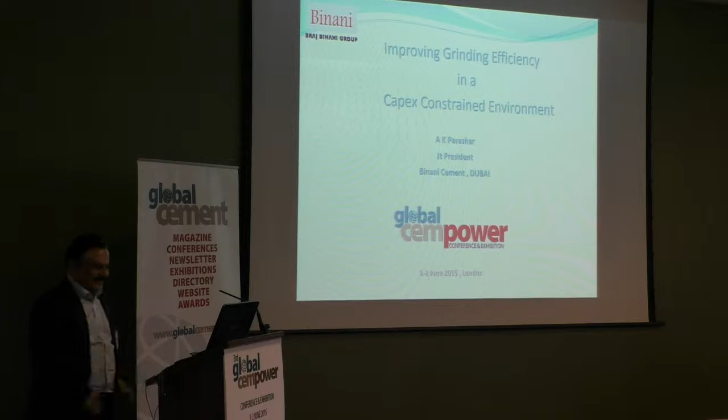Well, we really need a power pack presentation after this lunch.

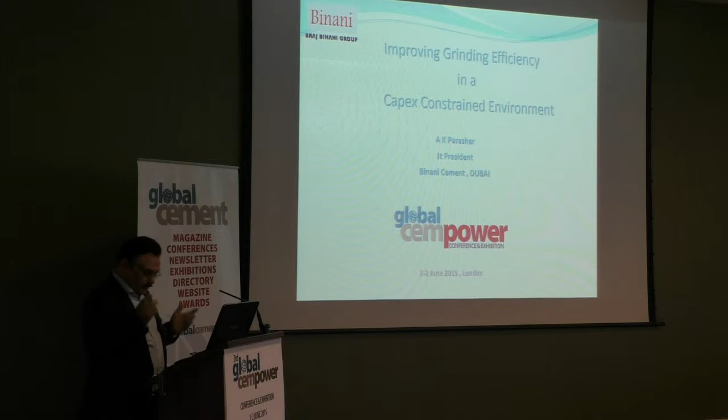Just to give you a very brief introduction of what we are and what we would like to become in a few years' time. This is basically the overview of our cement operations. In terms of cement, we are present in India with 6.5 million ton capacity, making various products. We are present in UAE, and we want to extend our footprints in Africa.

And very soon, what you see in green, we are most likely going to put up a greenfield project in the UAE region. Well, ambitions are quite big. In fact, we want to take the total capacity to almost 24 million ton in the next 5 years. Apart from cement, Binani is fifth largest in terms of glass fiber production. We are also into zinc, composites, and infra projects. So that's a brief introduction of Binani operations.

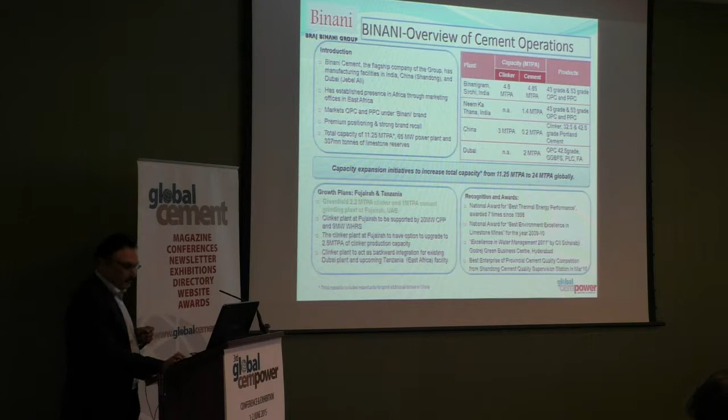Okay, let's come back to the main subject. So this is totally different from what you have heard in the last 1.5 days. We are talking of something which is time tested, but more traditional in nature. Personally, I have almost completed 10 years with standalone grinding units. See, it's always very nice to convey to someone that I operate the largest grinding unit. But when you say largest, you also bring bigger problems with you.

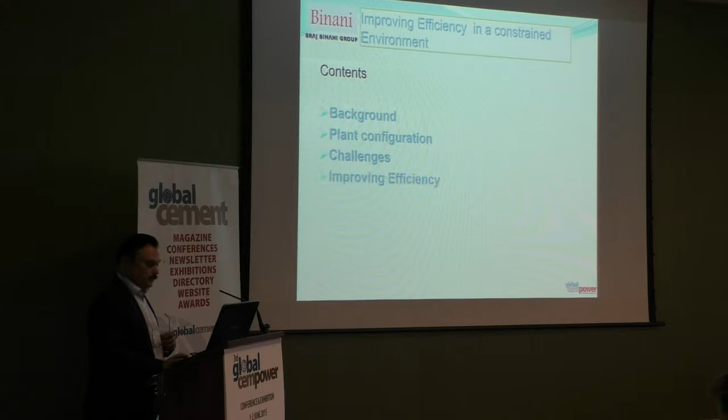You have more variables. You are dependent on material which is 100% coming from outside, because you are not producing anything. So this is my second standalone grinding unit. The first one was sold twice. I did nothing. And this one I have now been operating for the last 2.5 years. Coming to contents, we have the background, plant configuration, what are the challenges we are facing, improving efficiency, future plans.

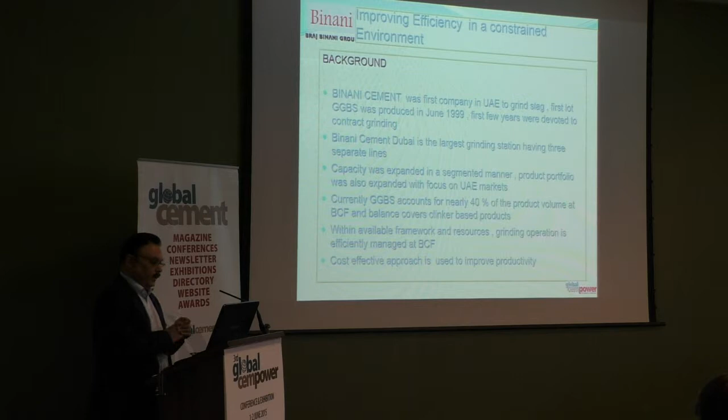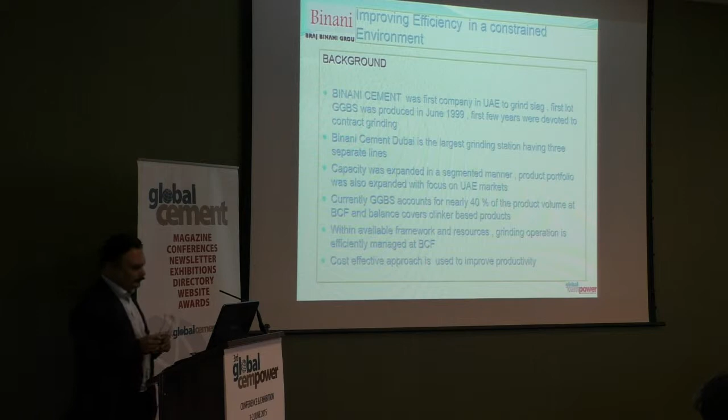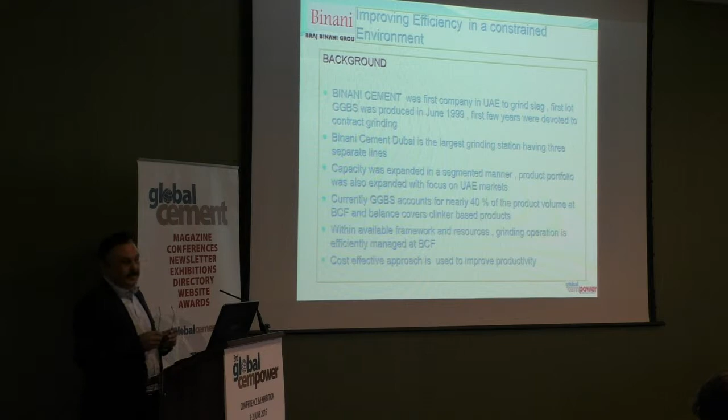Coming back to Binani Cement, in fact, you will find a lot of flavor in terms of slag. And the reason is, Binani was first to introduce slag in this region, and we started with not clinker grinding but slag grinding, way back in 1999. Capacity was expanded in a segmented manner. We started in 1999, then added in 2006, and then a further addition in 2011. Currently, slag is not even 40%, it is touching 50% of our total production.

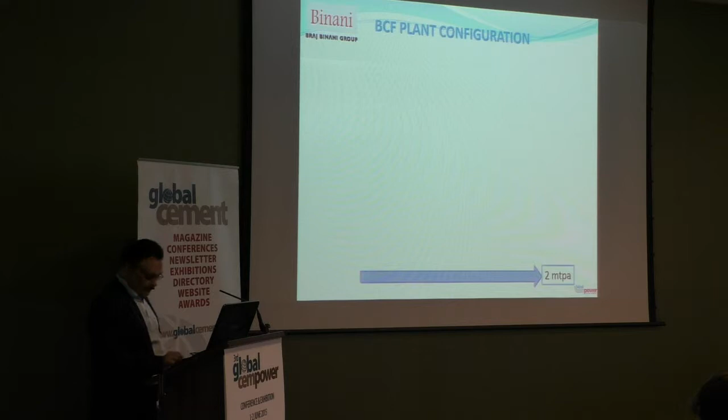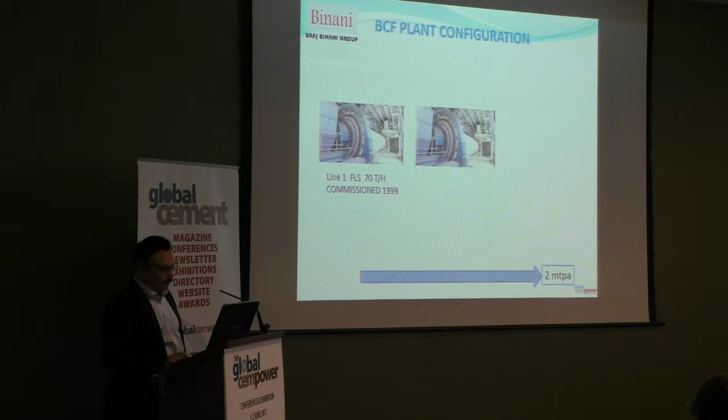Within the available framework and resources, we are trying to manage our job efficiently and adopt a cost-effective approach to improve both productivity and efficiency. Now let us look at the plant configuration. We have the first mill, which was installed in 1999. It is an FLS mill, rated at 70 tons per hour. The second one, again an FLS mill, absolutely no change in these two mills. This was installed in 2006.

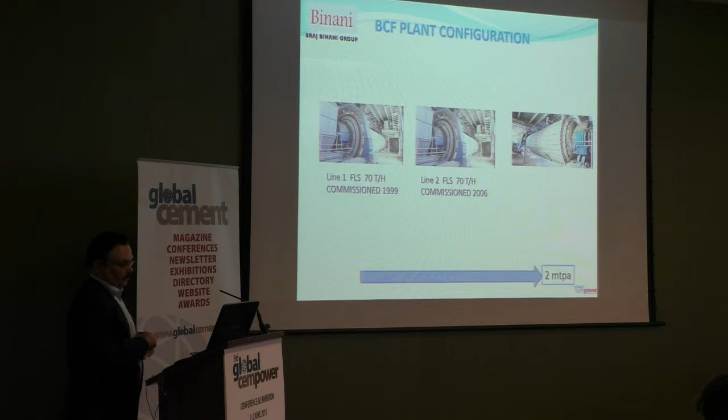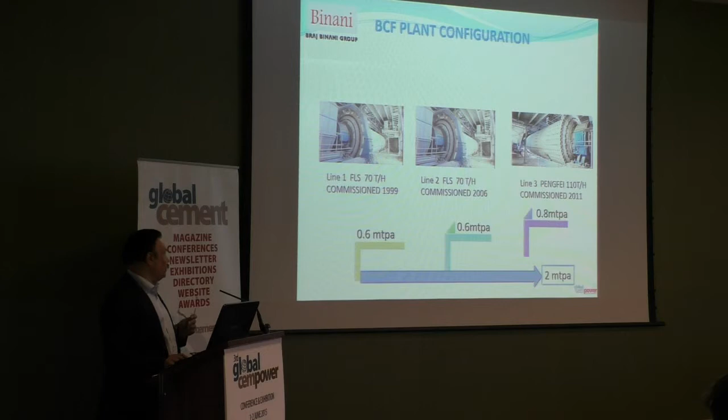And then we have the third mill, which is a Chinese mill. The manufacturer is Pengfei. It's a much larger mill, 110 tons per hour. But all of them are ball mills. We are quite happy with the first two. They have given us great service. The first one has been in operation for more than 15 years, no problem. But with the Chinese mill, we have a number of issues, in terms of the power available, mill internals, and overall performance of the mill. So this is how we have moved step by step. Total installed capacity as of date is 2 million ton.

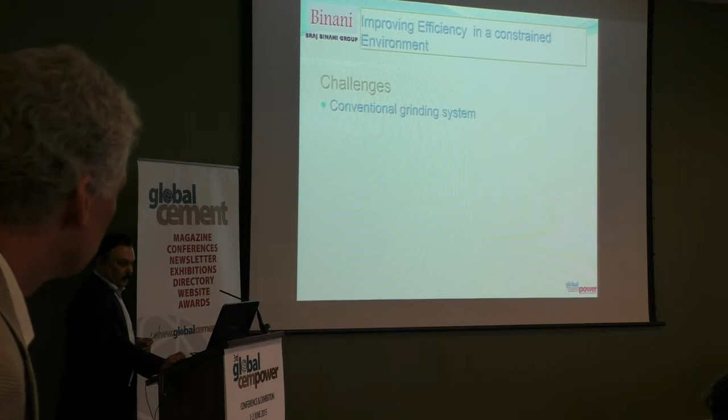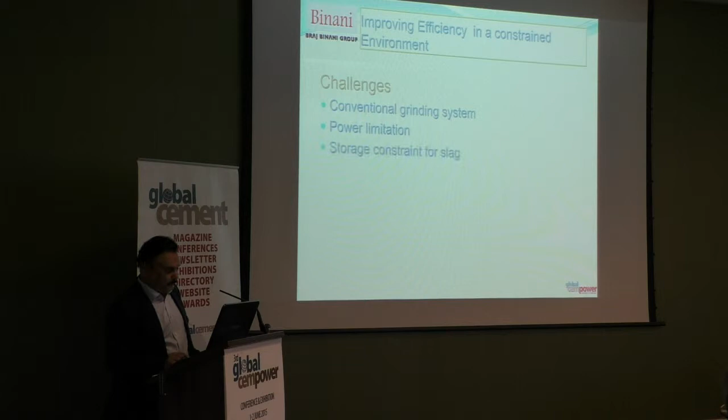What are the challenges? As I said earlier, it's a conventional grinding system, so we don't have the luxury of using a VRM or roller press for grinding. We also have a power limitation, and that's going to be the central theme of this presentation. The storage constraint for slag, which is our main product. Very competitive market. All of them are conventional closed circuit ball mills. You have a limitation. There is no pre-grinder arrangement as of date.

Then, being a standalone grinding unit, clinker grindability will change. The moment you change your source, you will have an impact on clinker grindability. So if you have a mill which is giving 80 tons per hour, change the source, it may come down to 75. So day in and day out, you have to live with these kinds of challenges. Again, if you are grinding slag, it will come to just half. From 80 tons, it may come down to 40 tons per hour. Higher moisture, you have more problems. So these are system design limitations.

Well, you can use HAG to dry slag, because worldwide slag is never available as a sun-dried material. You have moisture which may range from 5% to 10%. You have to use some kind of drying mechanism. In our case, in both the mills, a hot gas generator is installed, but currently we are not in a position to use it because of the cost involved.

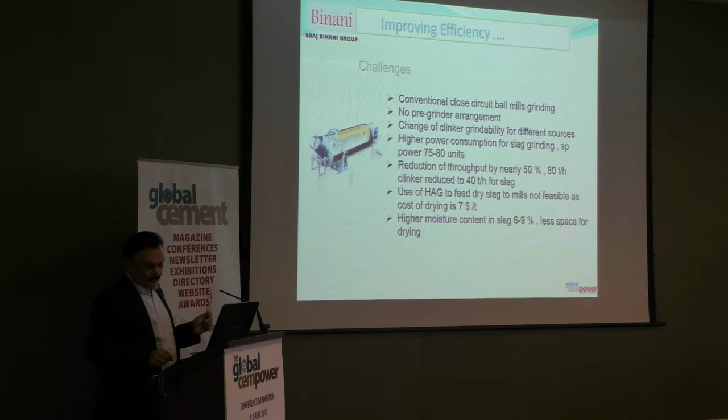Typically what we see is that slag, as received material, may have moisture varying from 6% to 9%. And this is the average figure. So,

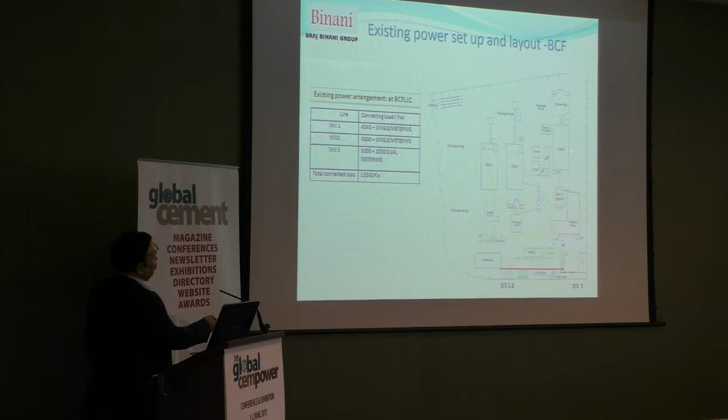So total installed power which was available was 13.5. And this is the layout. The middle one is number 1, number 2 and number 3. Okay.

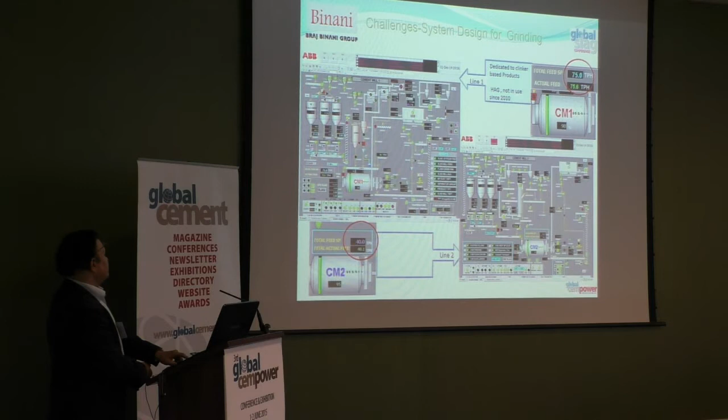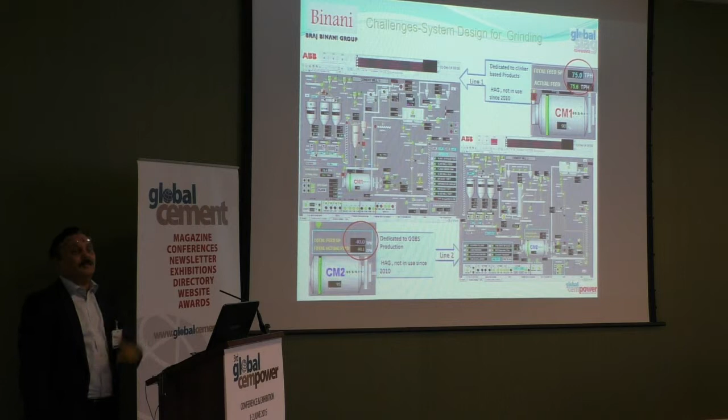Well, coming to system design challenges, as I was trying to explain to you, this is slide number 1. So when we are operating on clinker grinding, normally we get 75 to 80 tons per hour, depending on what clinker we are grinding. We do not use a hot air generator. This is a screen capture of this mill. But when you go to slag grinding, it all changes and it comes to half. So from 75, it has come down to 40 tons per hour. So this is a major impact on your mill capacity and plant availability. You just come to 50%.

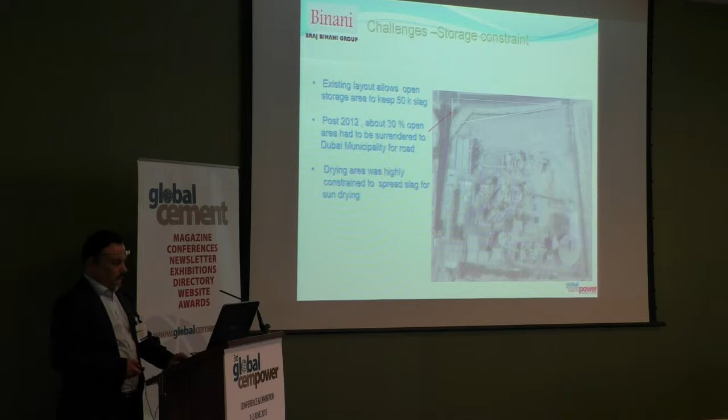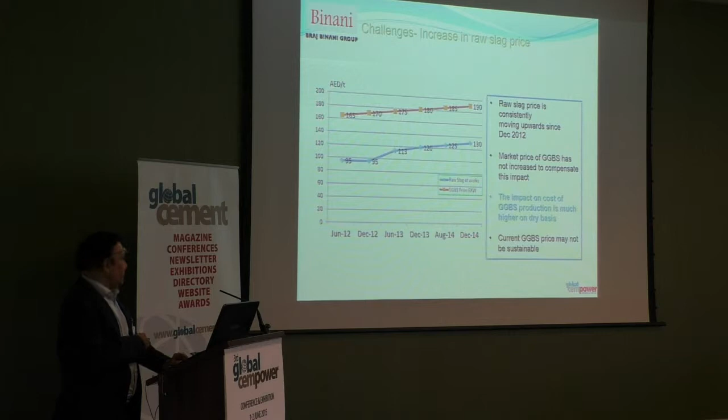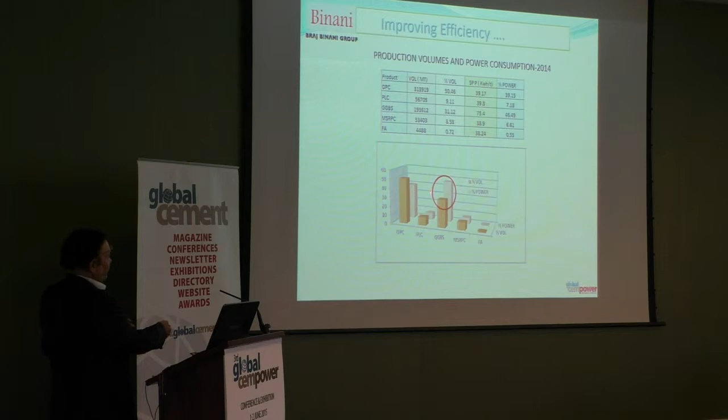But in terms of plant performance, this is what we have done in the last year. Now, what is important here is that this is a normal scenario when we look at clinker-based product. Normally, you consume under 40 units. This is okay. But the real problem is slag. So we consume 75.4 units. What is interesting is that in terms of contribution towards total power, this is totally reversed. So slag with a lesser volume is contributing more towards total power.

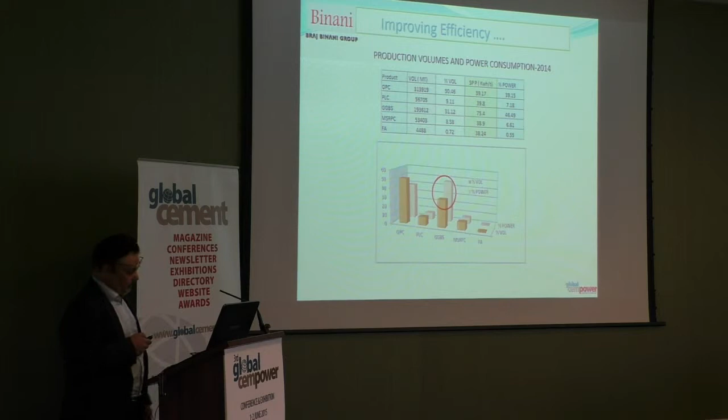Now this is our major grinding area. So this is the volume produced. So we produce only 31%, but in terms of contribution towards total power, it is almost about 47%. Now what we are looking at, at this juncture, is to increase the volume of slag. So this figure is likely to change. So we have to put more and more focus on somehow improving slag grinding efficiency.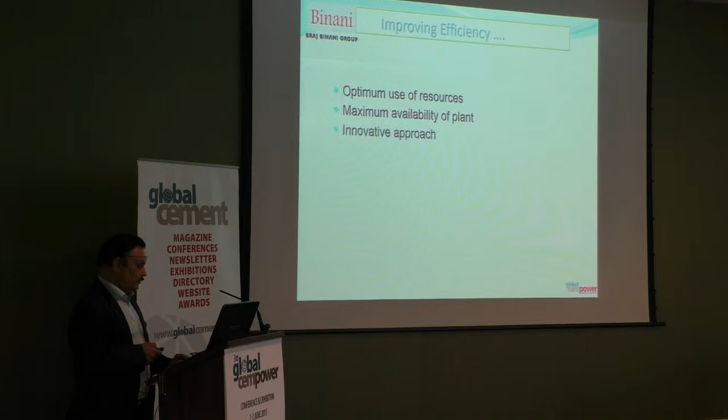So when we are looking at improving our efficiency, I always say it starts with optimum use of available resources, maximum availability of plant, innovative approach, specific performance for a particular line. You have to manage a product, which line to be used for which product, and basically conversion of challenges into opportunities. So this is what we have done.

So when this problem was thrown at us, there was a situation. We invested almost about $25 million in that Chinese mill. And in 2012, up till the middle of 2013, we were staring at this cost as a sunk cost. There was no solution which was available to us.

And the reason was, now you have seen that the power was available to all the three mills. But the last mill, where you have a split, you have 3 megawatt and you have 2 megawatt. The major problem is the main drive for line 3 actually required 3.8 megawatt. So if you do not have available power, you can't run it.

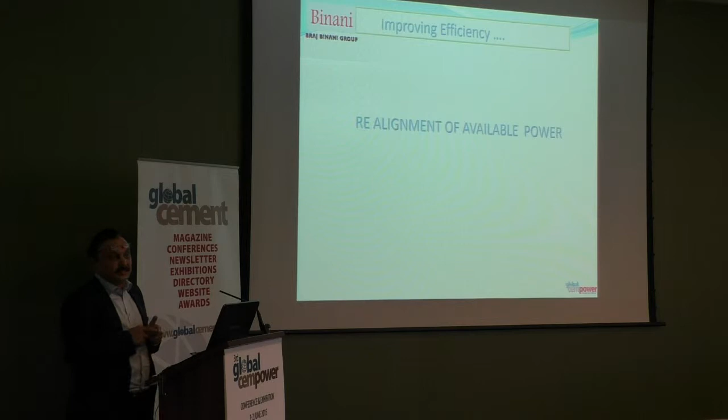If you have to run it, you have to run it only at 60% loading, so you have a major implication of consuming maybe about 25 units more. So this is a dilemma which we had, and we had almost come to a conclusion after analyzing whether it is possible to relocate this mill. We sell it to someone, but nothing was getting firmed up. So we were looking at almost $25 million loss. And from 2 million ton installed capacity, we were reduced to only 1.2. So what's the solution? We did this job in 2 phases.

The first phase was, now this is the arrangement which was available before January 2014. So you have line 1, line 2, line 1 and line 3, which was not in use. So you have auxiliary and main power. This required 3.8 megawatt. There was no problem with other 2 units.

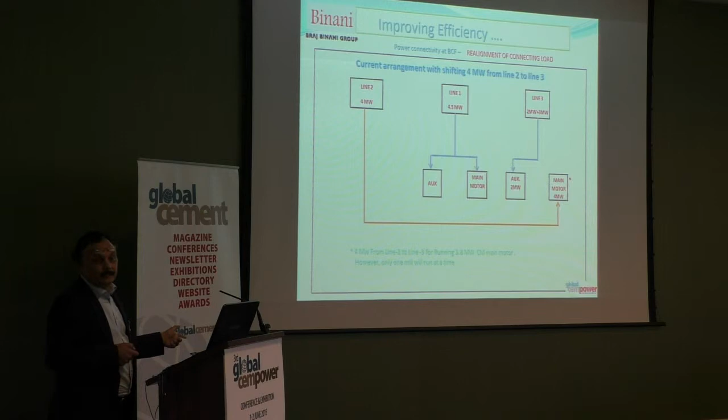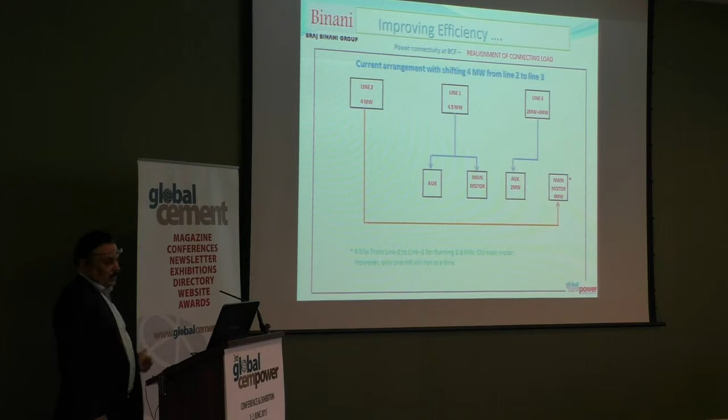We used a very simple approach but practical solution, and that solution was we relocated or reassigned the power from this line to this line. So that 4 megawatt was transferred to line 3, and this allowed us to run that particular line. So this is the arrangement which we are using right now. 4 megawatt was transferred from this line to this line. Now this allowed us to run this line, and not only this line, it gave us a lot of flexibility in terms of product changeability.

So if you have to see this allocation in terms of product, we have OPC, ground slag, line 2 again ground slag, and line 3 again ground slag. We have the capability of grinding slag in all 3 mills.

So this is, you have line 1 and line 2. So this power was transferred from here to here. Well, luckily in our case, this distance was not big. We are barely looking at 125 meters from one substation to other substation.

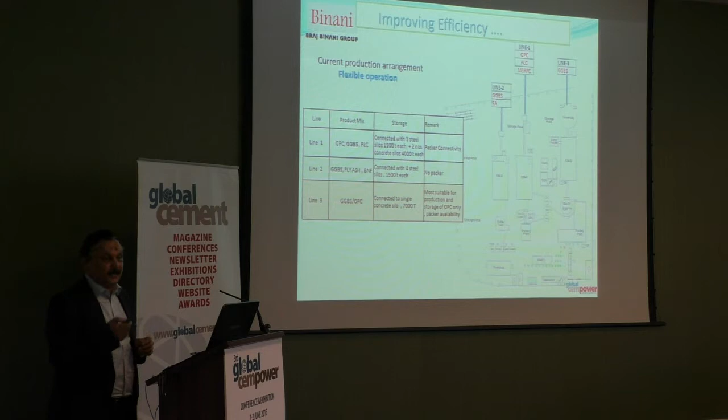And of late, what we are doing, right now we have dedicated line 3 to only slag grinding. All clinker based product we have shifted to line 1, and then this we do on alternate basis. But the problem is this job was only half done. We have to use either mill 2 or mill 3 on alternate basis, because we only strap the power from one line to other line, and we use an alternate method. So if you required, we are running line 3. If you wanted, then you are running line 2. But there was no possibility of running all the 3 mills together at the same time. So job was only half done.

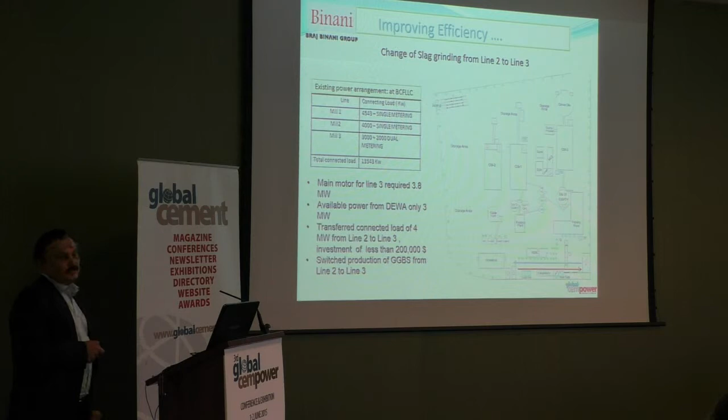In terms of all utilities, we moved this to 3.8 megawatt. Available power was only 3 megawatt from DEWA, which is an authority. So this line was transferred, and the total investment for this job, well, it was less than $200,000. Next to nothing. And we switched entire production of GGBS from line 2 to line 3.

Let's see what is the result of that. One of the major advantages which we got was that there was nearly 50% increase in production. So mill, which was giving us 40 tons per hour, started giving us 60 tons per hour. And this is a change from moving from line 2 to line 3. So we are using larger mill to increase our production. No other change, only transfer of power from mill number 2 to mill number 3. And this we are doing since May 2014 now. So almost 1 year is over. Well, so far so good, there is no problem.

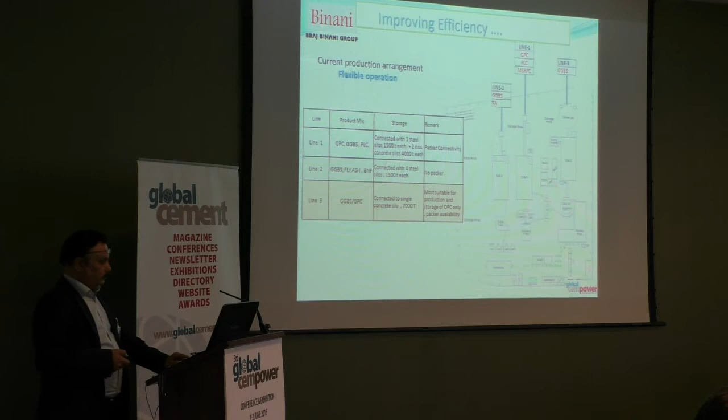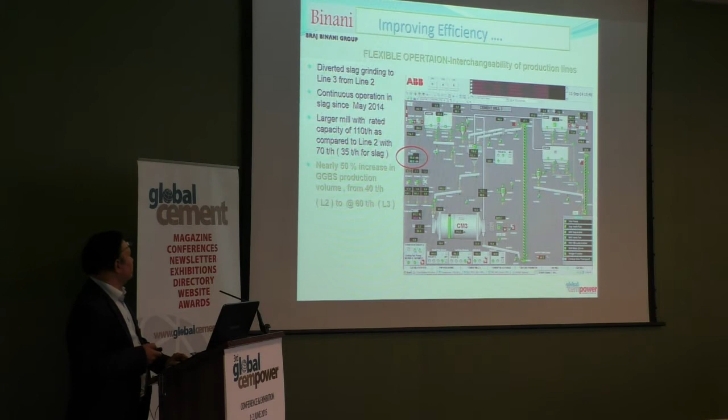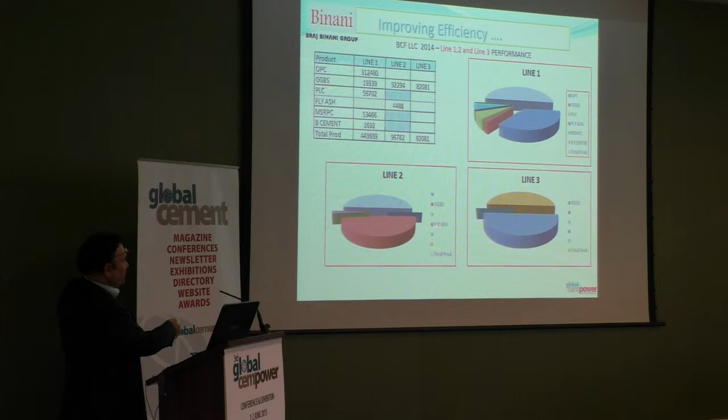So you can see line 1 is fully loaded and all the products are produced here. Line 3 is totally dedicated to GGBS, and in line 2 we also produce fly ash and ground slag. So you have a lot of flexibility in terms of your operation and plant availability.

Alright, now the challenge for this year is we would be going to almost 1 million ton production, and that also includes almost about 350,000 tons of slag. Are we really ready to do that?

We have made very good progress. It was practically next to nothing when we started in 2012, but then we made very rapid progress, and hopefully in next few years we would be almost close to 1.5 million ton. So line 1, almost 71% production, 15% and 13%.

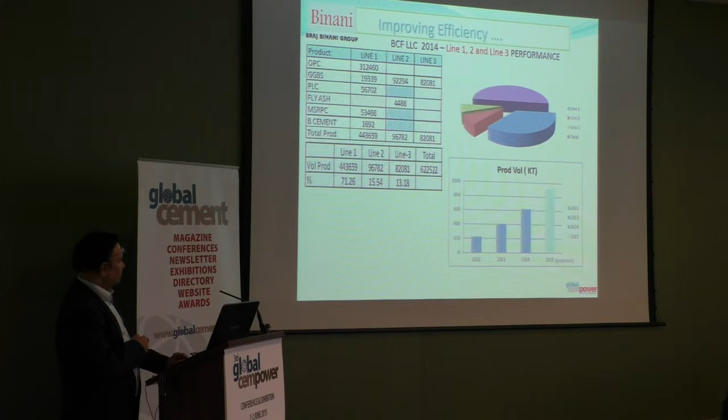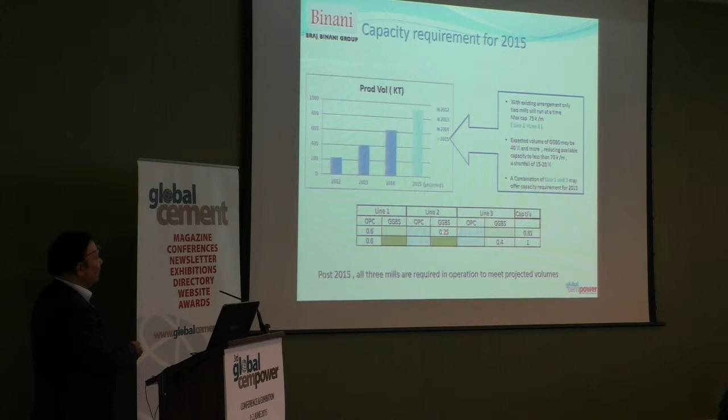So what's the next challenge? Now the challenge is, if you have to really cover this type of volume for this year, you need all these mills. But the problem is, with line 1, you have an available capacity of 0.6. If you start grinding slag, you come down to only 0.25. And remember, we can run only 2 mills at a time, not all 3, so you are limited to 0.85.

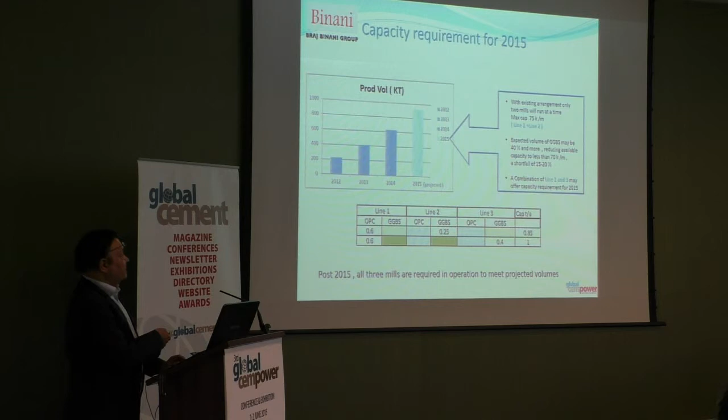If you change to line 1 and line 3, well, much better, we can go actually to... So for this year, possibly you will be able to manage the job with a combination of line 1 and line 3. But then what happens next? Possibly towards last quarter, we may struggle to manage 15-20% additional volume.

So again, we analyze the complete power allocation to the plant threadbare, like which drive is consuming how much kilowatts. And once we analyze that, we realize that yes, there is no problem. We are not consuming total power which is available from the grid or main substation.

So this is main motor, this is auxiliary. Line 1, this is main drive. Again line 2, these are twin motors, and this is central driven.

This will now change. So post 2015, this job is happening right now in the plant. In Q2, you will be able to complete all the lines, and this power will also be transferred. In that case, we will have the total connecting load available to us.

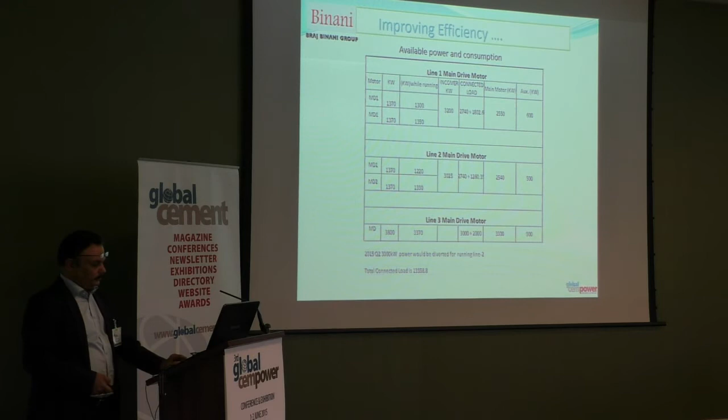Well, what is interesting is that if you have to take that additional 1 megawatt which was short, we need to invest almost 7 million AED, converted to dollars. This is a direct investment.

I am not taking into consideration the amount of time which would be involved. You have to approach authorities, which may take about 1 year or maybe even 2 years. You have to take this line from the main substation. It may be available, it may not be available to you.

Modification of slag circuit, if you have to go for pre-grinder, if it is a standalone grinding unit, you do not have too many options available to you. You can only go for pre-grinder, something like a roller press. Investment is almost close to $6.5 million.

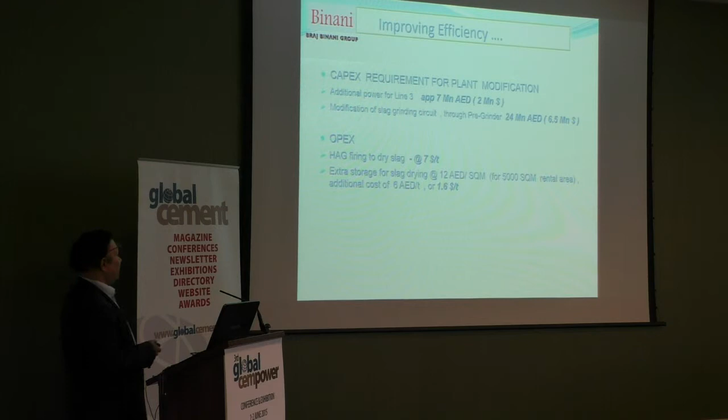How do you save this much money? Again, in terms of operating expenditure, we are not able to use a hot air generator to dry slag. The cost is $7 per ton. If you go for extra space, which is now available, again you have to spend almost about $1.6 per ton per square meter.

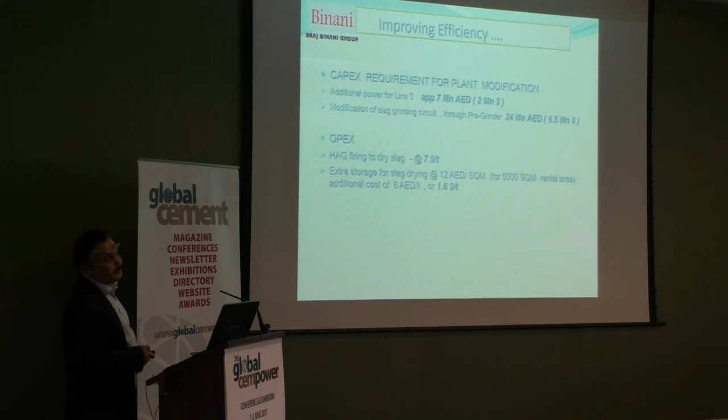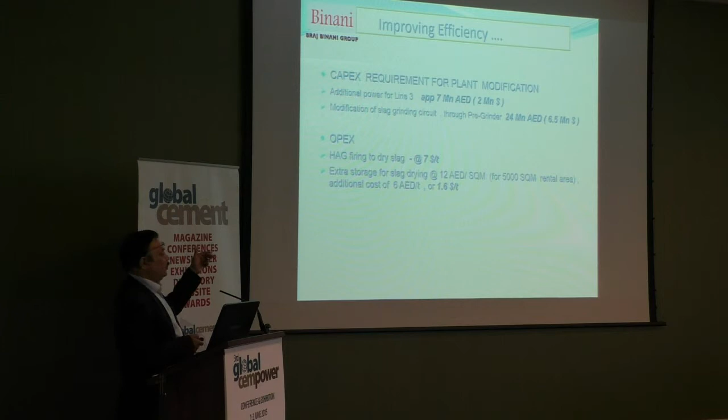So again, it's a problem. We are not in a position to spend so much money, or even for getting some extra space. So you have constraints in terms of capex and also in terms of operating expenditure. Solution?

Well, we have to go for further realignment of power. And this time, what we did, that 3 megawatt which was unused — remember, 3 megawatt was transferred from line 2 to line 3 to make it operative — but that line also has its own power available.

Now that line was idle. So we moved that 3 megawatt. So basically it was a complete swapping of connecting loads from line 2 to line 3 and from 3 to 2.

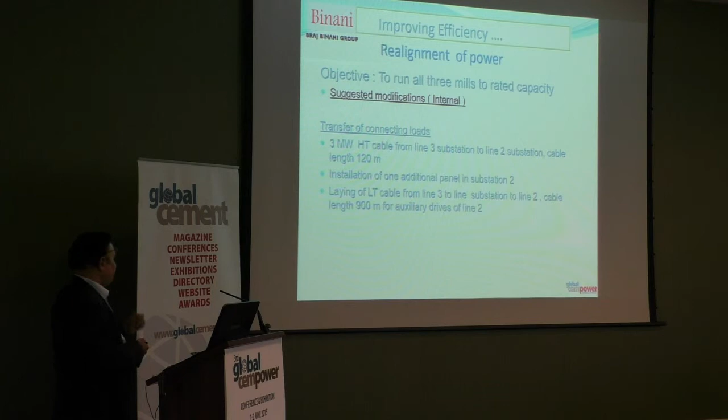There was no major job which was involved. Basically a 3 megawatt high tension cable from line 3, only 120 meters. We need panels because you are transferring the power. Laying of LT cables from that main substation to the plant site, which are about 800 or 900 odd meters. So not a major investment.

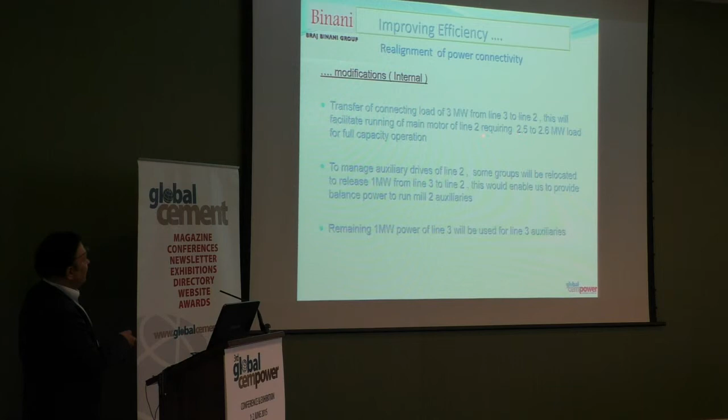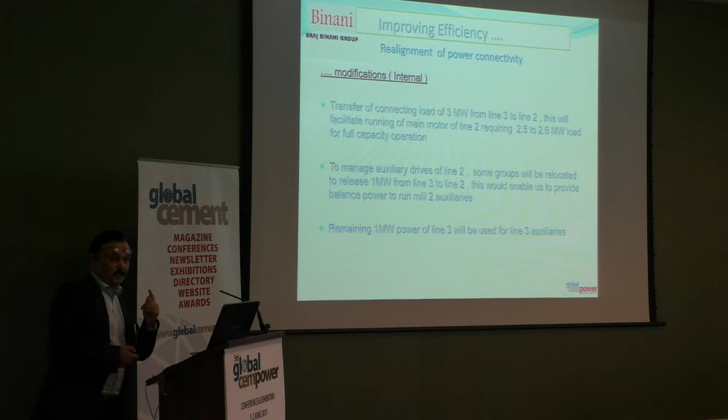So once that 3 megawatt was transferred, this would give us 2.5 to 2.6 megawatt, which would be able to run line 2 again independently. To manage auxiliary drives, you need 1 more megawatt power because you have transferred 4 and taken back 3, so you need 1 more. So 1 more was drawn from line 3 to run the auxiliaries.

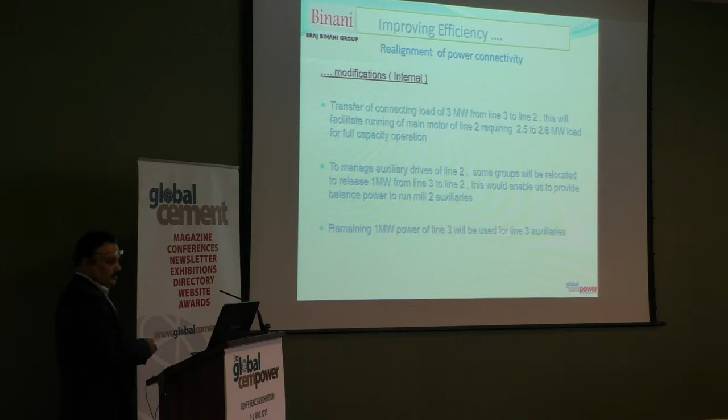So I think it will be more clear when we look at this diagram. So what we have done, this was phase 1. When line 2's 4 megawatt was transferred to this side, making it operational.

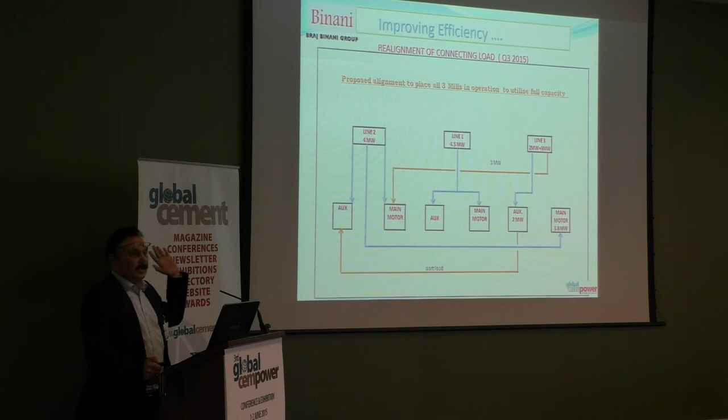Now whatever was available here, this was again transferred back to line 2. So this is operational and we need 1 more because you transferred 4 megawatt. 1 more megawatt will be spared from this line to make auxiliaries also totally functional. So this is a scenario where with almost about $700,000 investment against $2 million, we would be able to run complete lines independent of each other to full capacity.

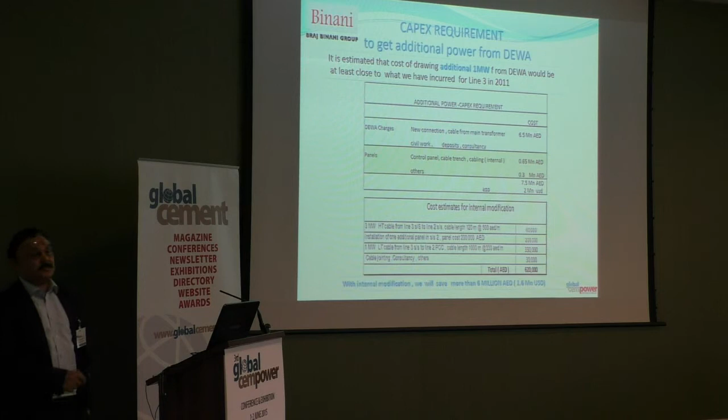What else did we do? Because everything is linked to power, it's a grinding station. We also reduced our inventory of 2 materials and created more space for slag grinding. Both limestone and gypsum are locally available, so instead of having 1 month inventory, we reduced it to half. So this land was available, and we now use it for drying.

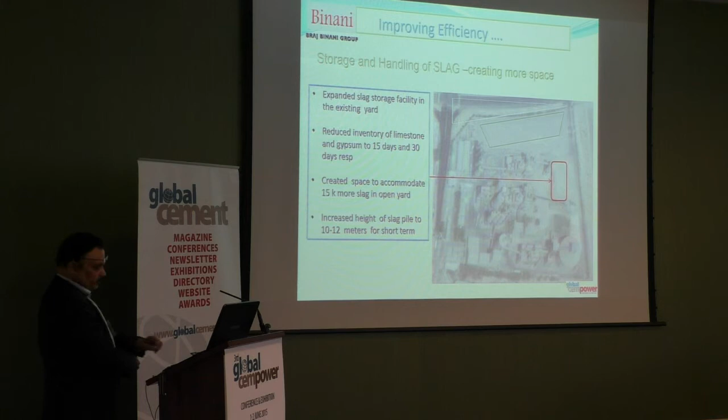One more thing which we did was we increased the height of these piles. This was the original scenario. We increased the height to 10 to 12 meters, creating more space for sun drying, and that's the approach which we use.

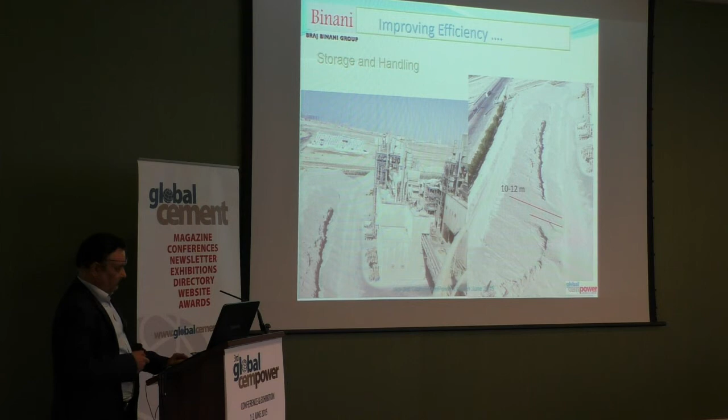What else have we done? Well, we have managed to save a lot of fossil fuel. We are not using hot air generator. This is what we started in 2010, and by end of 2015, we would be saving almost $5.2 million purely on account of no diesel consumption in hot air generator.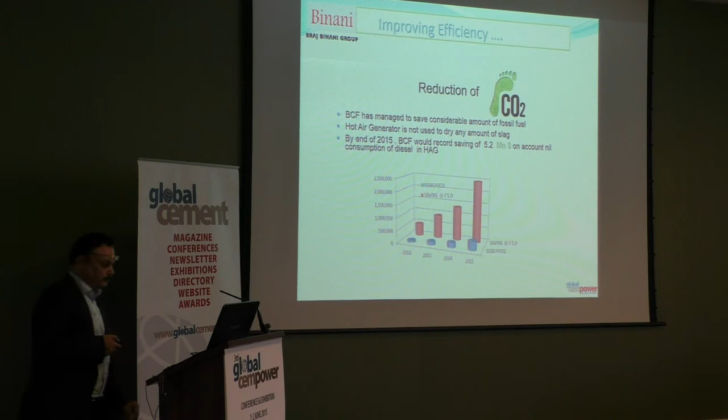So what's the future scenario? Now a lot of changes are happening. Apart from the growth in construction, recently Dubai municipality has announced use of GGBS, ground slag, and fly ash as mandatory in all substructures and superstructures. That would mean more use and more consumption of slag.

So if you have this kind of scenario, we expect that Dubai alone will consume at least 500,000 more slag. Plus, you also have events like Expo, and then the World Cup in Qatar. These events are further going to fuel growth of cement as well as cementitious materials in the region.

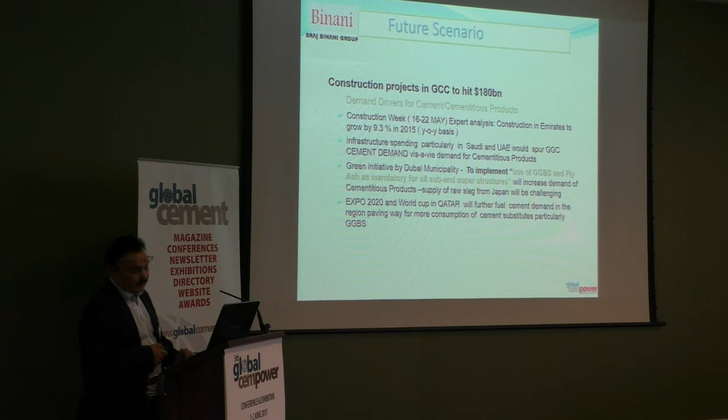So everything has a limitation. We did quite well in terms of swapping of power, but then you have a limitation. If you have to produce more slag, something close to 500,000 tons per annum, then there is a limitation.

So this is what we aim to produce in the year 2017-2018. This is the time when all these events will be having their peak consumption, either Expo 2020 or World Cup in Qatar. So the best solution which we have found, and very seriously we are considering, is that one of the mills will be converted, or we will install a grinder in one of these mills. So straight away that 40 ton becomes 80 tons per hour.

We have a saving which is guaranteed to us. It would be at least 30 units per ton, quite big in terms of power saving. So from almost 0.3 million ton, you would be adding now almost double the capacity, reaching 0.6 and 0.8 with slag grinding. So the total installed capacity with a mix of slag and OPC would be available to you. Total 2 million ton in operation.

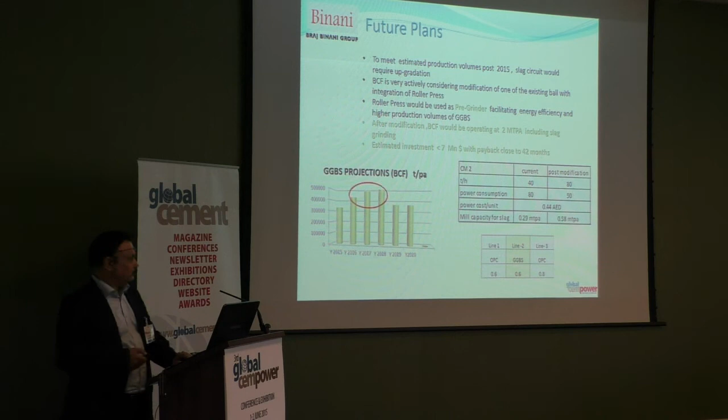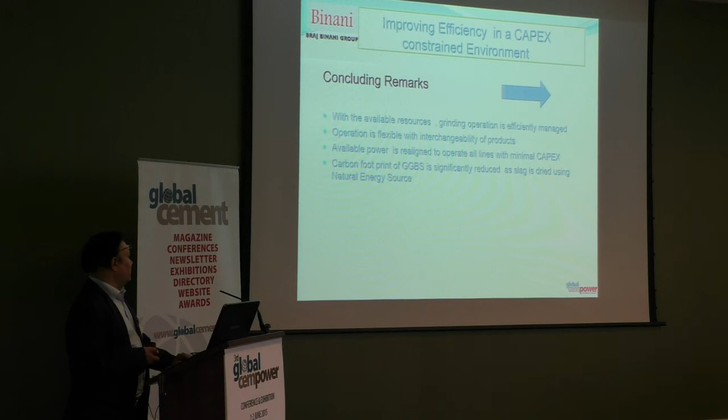So just to finish up, whatever resources are available, we are able to manage our job quite efficiently. Operations are flexible, and we are looking at some more additions. Carbon footprint is significantly reduced, and we are aligned with future demand which would be generated. So in terms of adding one pre-grinder, we are looking at a payback period of less than 4 years, with an investment of almost 24 million dirham.

The strategic actions are already planned and in place to manage cost competitiveness. There was a time when we started the business of slag grinding in UAE. Today the competition is quite tough, with 7 players, including MNCs and smaller players.